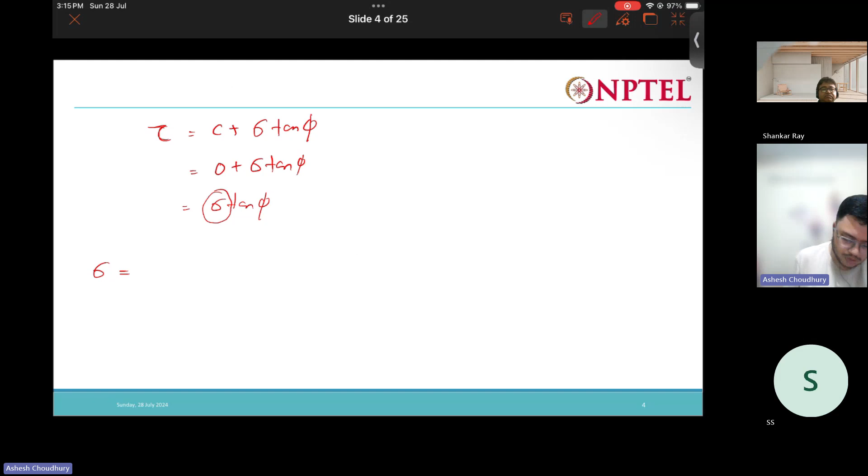2.4, so this is 2.4 into the density of this part. Here the soil is actually dry, so we can write a dry unit weight, which is given. So this is 2.4 times 17.06, plus this 5 minus 2.4, that is 2.6

times the submerged unit weight, isn't it? So here we will have to use the submerged unit weight. So for that we need to find out the submerged unit weight. The submerged unit weight is given by G minus 1, by 1 plus e, into gamma W.

G we know, but E, that is the void ratio, we don't know. So how to calculate that? We can calculate that from the dry unit weight. So dry unit weight is G gamma W over 1 plus E, this much only.

So this gamma W, gamma D is given as how much? 17.06. G I have already, 2.69. Gamma W is 9.81. So 1 plus E - from here what I can do is find out E. So please calculate the E value from here, the void ratio value.

Alright, now the next task is: what if the water table rises to the ground surface? Then what do you think is going to happen? Will the effective stress increase or decrease? Will decrease. Yeah, effective stress is going to decrease. So just find out the new effective stress.

It is going to be 5 times 10.73, because everything is submerged now, which is 53.62, right? So then again you can find out the shear strength from here: 53.62 times tan 38, so we will get some lesser value of this shear strength, right? So quite easy and simple.

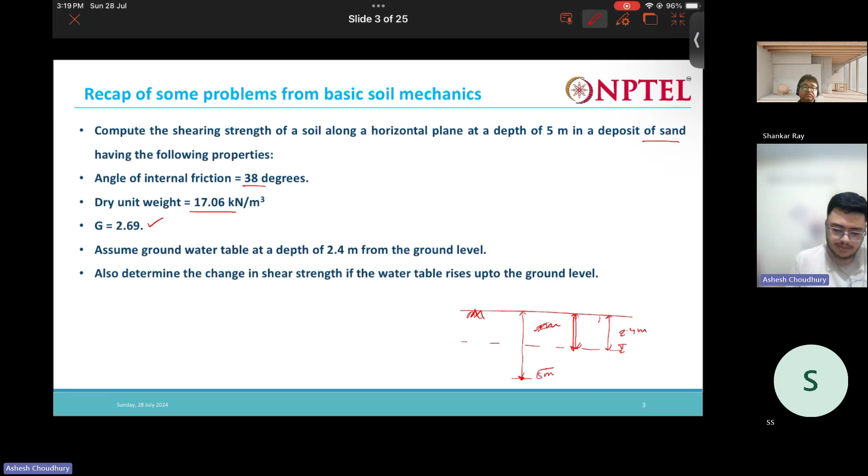So with this we recall our basic concept of shear strength. Now let us see one more problem related to shear strength itself. A standard specimen of cohesionless sand was tested in a triaxial compression test, and the sample failed at a deviator stress of 482 kPa when the cell pressure was 100 kPa under drained condition. The condition is drained, meaning the pore water pressure is 0 here.

Find the effective angle of shearing resistance of sand - this is the first part. Then, what would be the deviator stress and the major principal stress at failure for another identical specimen of sand if tested under a cell pressure of 200 kPa. Let us forget about that for now and solve the first part.

So it is given that the deviator stress at failure is this, and the cell pressure, what is the confining pressure? Confining pressure is 100 kPa. And what is this confining pressure? Confining pressure is nothing but the minor principal stress, sigma 3. So we can write this as sigma 3 dash.

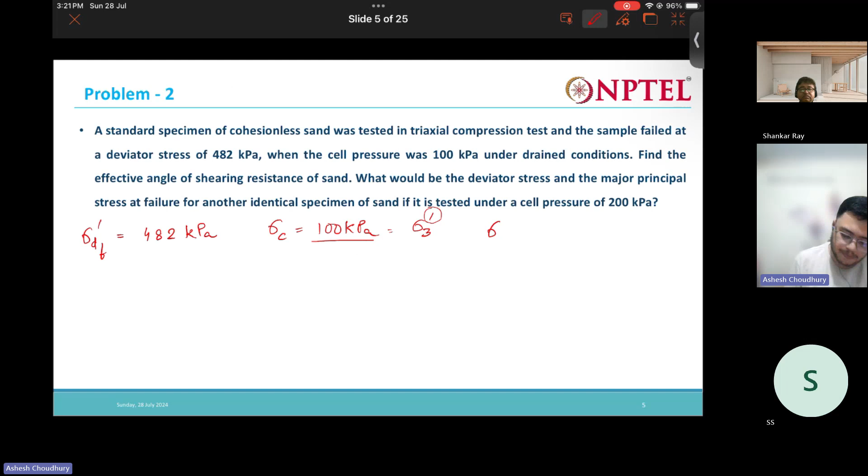This dash actually refers to effective. Since the soil is in drained condition, we are saying the pore water pressure is 0. So total minus 0 will give us only the effective value, right? So this cell pressure of 100 kPa is the minor principal stress sigma 3. Now what will be the major principal stress sigma 1 dash? What is that major principal stress going to be?

482 plus 100, that is 582.

Okay, correct. Now the first part is to find the effective angle of shearing resistance of sand. Can you recall the equation that relates the principal stresses? This also comes from the Mohr-Coulomb failure theory. What is the equation that relates this with phi and c?

So one more basic equation that we have: sigma 1 prime is equal to sigma 3 prime times tan square of 45 plus phi by 2, plus 2c tan of 45 plus phi by 2. This is the same Mohr-Coulomb equation, just written in terms of effective stresses.

So sigma 1 I know is 582, sigma 3 I know is 100, tan square of 45 plus phi by 2, and this term is obviously 0 because c is 0. So just try to calculate phi from here, the effective friction angle phi prime.

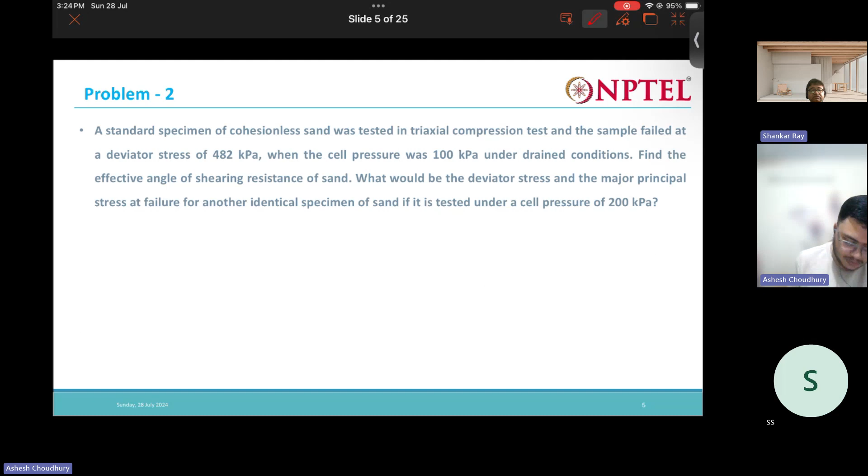Now I got the phi value from here. Since it's an identical specimen of sand, the phi is going to be the same. Now what is asked is to find the deviator stress at failure. So for that, my sigma 3 prime is 200. I can use the same equation.

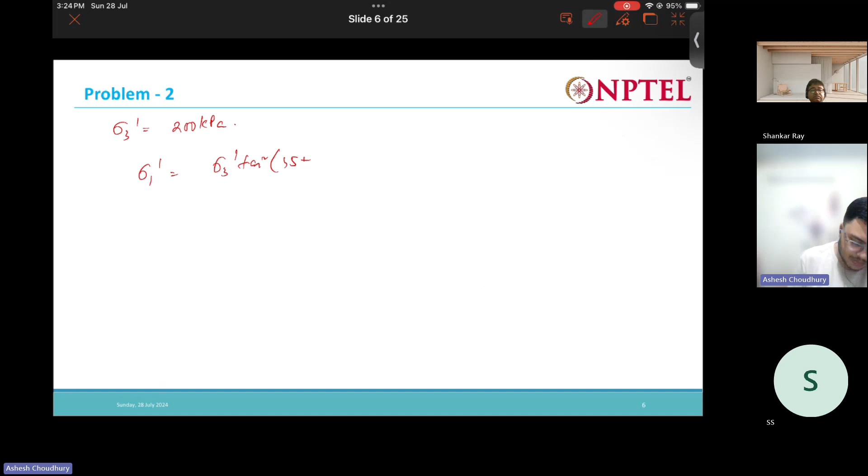45 plus 45 by 2. Please calculate this. Then finally from here I can get the deviator stress at failure.

1166. Okay, 1166 kPa, approximately. So now I have my sigma 1 as 1166. So 1166 minus 200, think what?

966, right? So this is my final deviator stress at failure for the second sample.

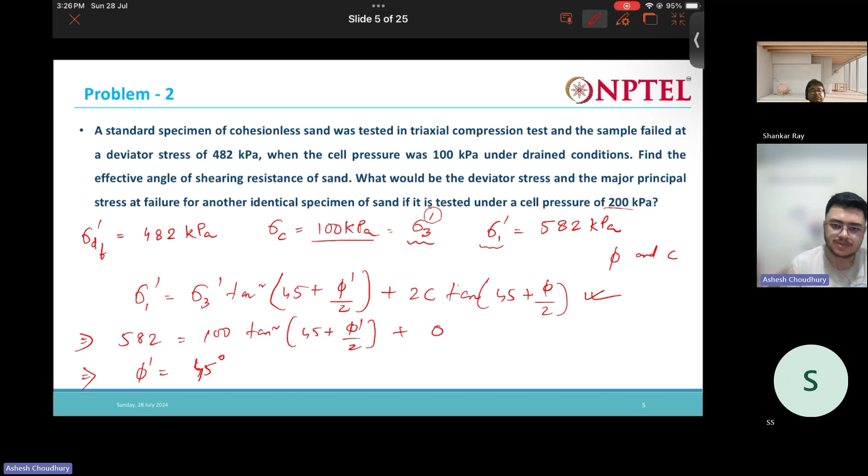Okay, so this problem was also quite simple. Directly just using basic concepts of what is deviator stress, which one is the minor principal stress, which one is the major principal stress. Those concepts we use just to solve the problem.

Now let us see this next problem. Two identical soil specimens were tested in a triaxial apparatus. The first specimen failed at a deviatoric stress of 770 kPa when the cell pressure was 200 kPa. The second specimen failed at a deviatoric stress of 1370 kPa under a cell pressure of 400 kPa.

Okay, so two samples are given, so four values are given. Determine the value of C and phi analytically. Let us first do that. So we'll get two equations with two unknowns, so we can easily calculate the cohesion and friction angle value.

Similar to the previous problem, we can solve this one also. So the deviator stress at failure values are 770 and 1370. And the cell pressures are 200 and 400. From here I can get sigma 1 for both: 770 plus 200 for the first, and 1370 plus 400 for the second.

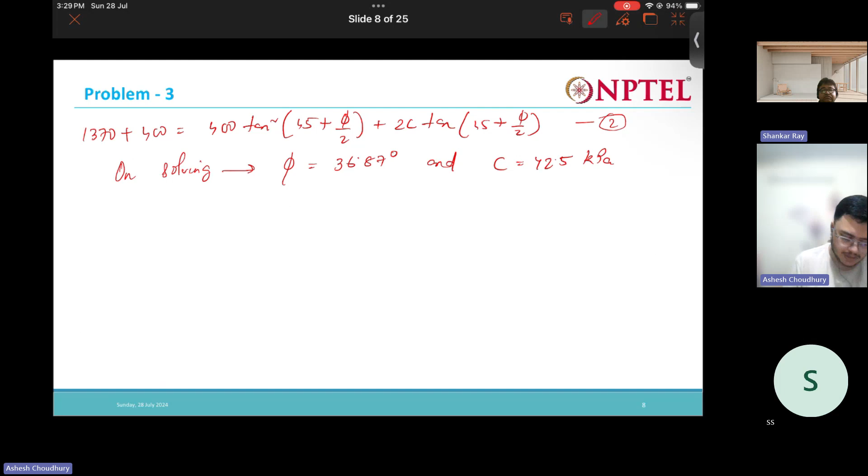Now the final part of the question is, if the same soil is tested in a direct shear apparatus with a normal stress of 600 kPa, estimate the shear stress at failure. Please do this one. Normal stress is given, C and phi we already know from here, and normal stress is given as 600 kPa. So easily we can calculate the shear stress at failure. Please calculate this.

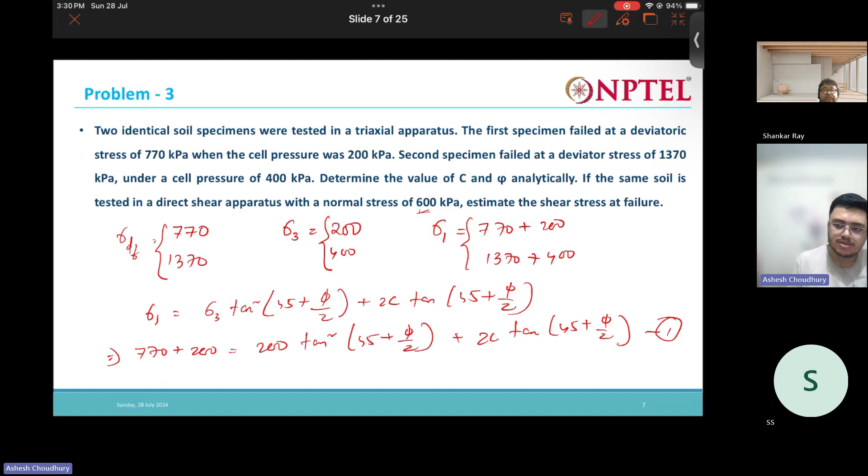So I have C, I have phi, and I also have the normal stress, 600 kPa. Similar to the first problem, just this basic equation, our basic Mohr-Coulomb failure theory, we have to use.

So this is the final result. Quite simple and straightforward.

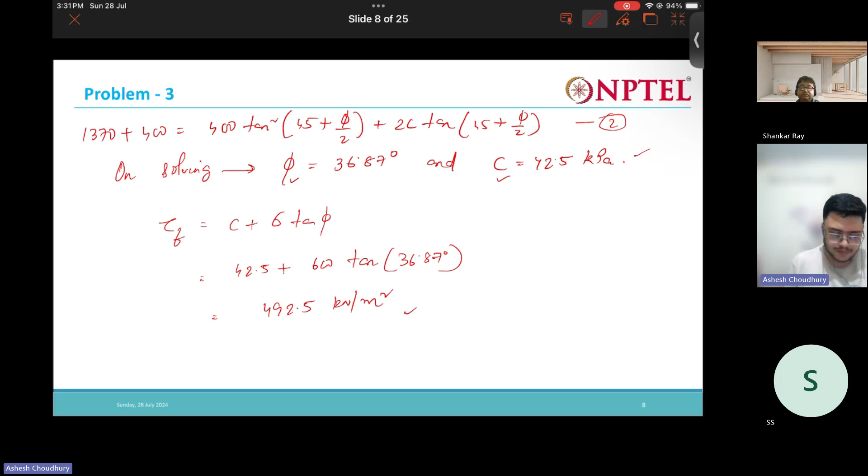Now let us see this. This is the case of a CD triaxial, that is consolidated drained triaxial test. If you remember, in the triaxial test we have two stages. The first stage is our consolidation stage, and the second stage is the shearing stage. Consolidated drained means in the first stage we are allowing the consolidation of the soil sample to happen completely, and then after complete consolidation, we keep the drainage valve open and shear the sample. We apply the deviator stress and shear the sample.

As we are allowing drainage, this is a consolidated drained test. CD tests generally take a long time to perform, because the shearing has to be very slow so that excess pore water pressure does not develop, and the shearing is slow so that water drainage is appropriate. So excess pore water pressure should not develop in that time. Loading rate should be adjusted so that water gets drained out without inducing any excess pore water pressure. So it's actually a very slow test.

So what is the question? A CD test was conducted on a normally consolidated clay, yielding the following data. Minor principal stress, sigma 3, is given, and deviator stress is given. Similar problem only, we need to find the angle of internal friction. This first part, the angle of internal friction, we can easily determine from the basic equation, whatever you use, from that you can easily determine phi.

Sorry, yeah, so say... sorry, just a second. What's wrong? Wait, just a second.

So say this is sigma 1 and this is sigma 3. This is a section, and say the failure is happening along this plane. This is the failure plane, and this plane is our major principal plane. This failure plane makes an angle theta with the major principal plane. So that angle we are asked to find out.

Third is the normal stress on the plane of maximum shear stress. If you recall, the plane of maximum shear stress and the failure plane are not actually equal. Failure does not occur at the plane of maximum shear stress. Maximum shear stress always occurs at a plane 45 degrees inclined to the major principal plane. But the failure plane is different, somewhat different. So that normal stress on the plane of maximum shear stress, we are asked to find out. We will see that.

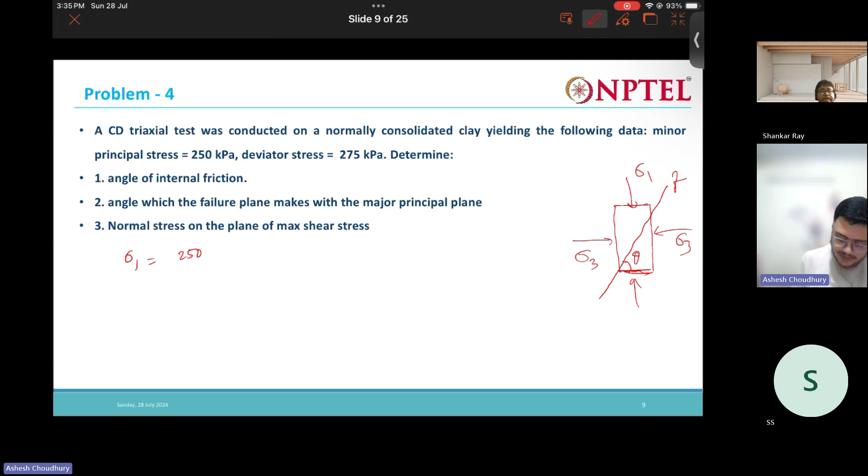So first, let us find out the angle of internal friction. Sigma 3 we have, sigma d we have. So what is sigma 1? Sigma 1 is nothing but 250 plus 275, which is nothing but 525 kPa. Now sigma 1 and sigma 3...

Now phi I can, so what is the C? Can you tell me what is the cohesion value for a normally consolidated clay? Zero. Yeah, for a NC clay, for normally consolidated clay, it's always zero.

Though it is a clay, from here we can recall one more concept from basic soil mechanics: cohesion is not an inherent property of the soil. Cohesion actually depends on the state of the soil. Here the soil is normally consolidated, that's why we get C equals 0. So this cohesion is not the actual inherent property of the clay.

The inherent cohesion which we actually get from the electrochemical property, that is the cohesion between the particles in the clay, in practicality that is actually lost. That cohesion hardly plays any role. But this cohesion value that we define here actually comes from something else.

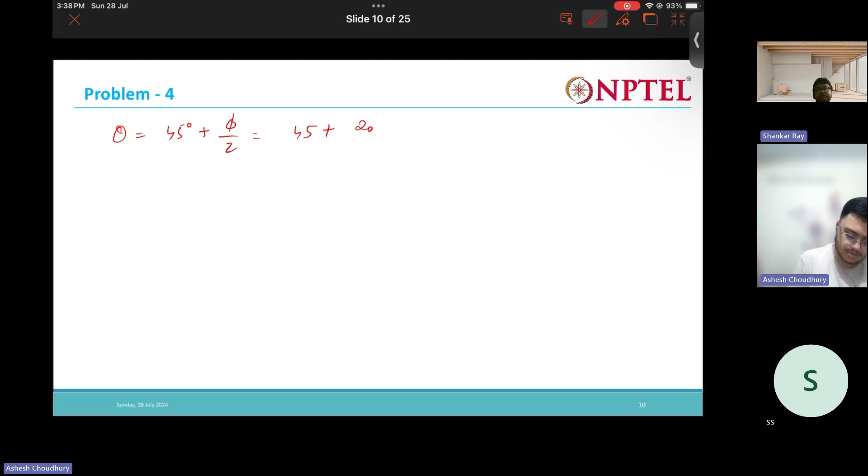So 45 plus phi by 2 is 55.39. Okay, done. The final thing that is asked is normal stress on the plane of maximum shear stress.

So let me just draw a Mohr circle. So this is the shear stress, this is the normal stress. This is the point of maximum shear stress, right? So here we have tau max. So this angle is how much? 45 degree.

So what we are asked to find out is this. What is the normal stress at this plane? For that, we can directly use this relation: sigma 1 plus sigma 3 by 2, plus sigma 1 minus sigma 3 by 2 into cos 2 theta.

So what is sigma 1? Sigma 1 plus sigma 3 is 525 plus 250, by 2. And sigma 1 minus sigma 3 is nothing but our deviator stress. What is the deviator stress? 275. Cos 2 theta. So from here I will get 338.62. Done.

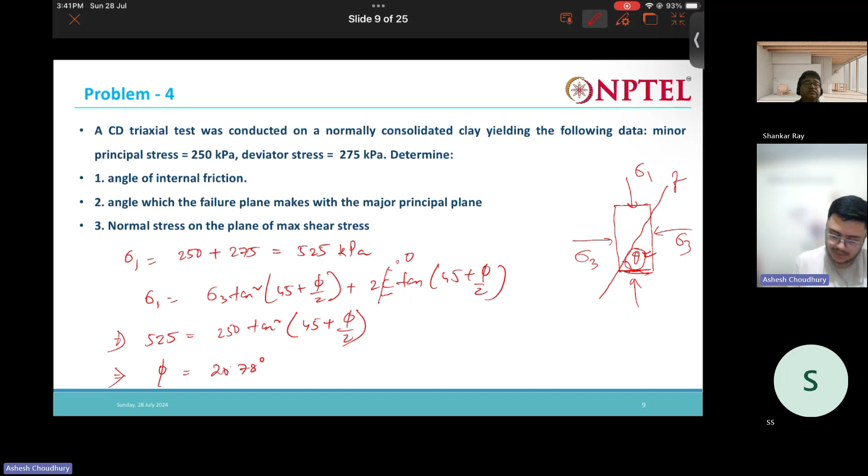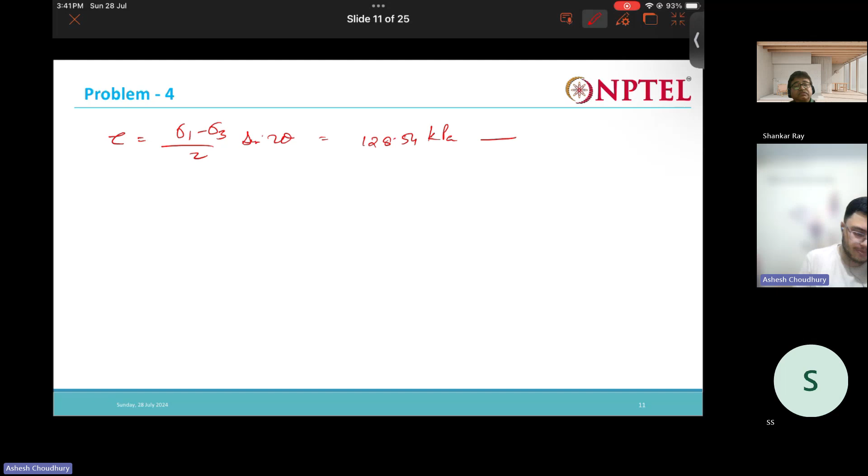Now it is tau is equal to sigma 1 minus sigma 3 by 2 times sin 2 theta, right? So this will come out as 128.54. Okay, this is shear stress at failure plane.

And one more thing, the last question: what is tau max, the maximum shear stress? This is the normal stress at failure plane. Yeah, and this is the shear stress at failure plane.

Now I am asking what is the maximum shear stress? Very simple, this is the deviator stress by 2. Correct, the deviator stress by 2, it is sigma 1 minus sigma 3 by 2. How much is the deviator stress? 275, right? 275 by 2.

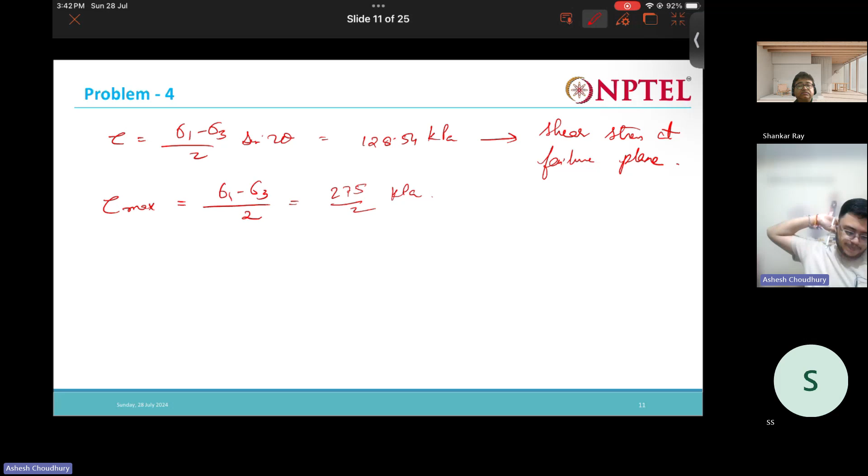Okay, so we found out the normal stress at failure plane, right? And what is this normal stress that I was asking at the beginning? What is the normal stress at the plane of maximum shear stress? So this is the normal stress at the failure plane. What is the normal stress at this plane where the shear stress is maximum? What is this? That's simple.

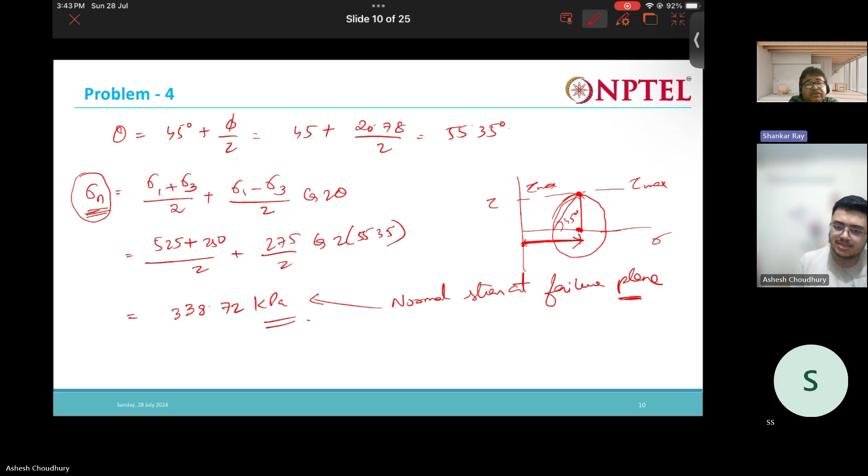The distance of the center of the Mohr circle from here. Can you repeat the question? I asked: what is this sigma and what is this that we found out? What is this one? Normal stress at failure. Correct. And this is the shear stress at the failure plane, right? And this is our maximum shear stress.

Right. So at the plane where we are getting this maximum shear stress, at that plane what is the normal stress? That I am asking. At the plane of tau max, what is the normal stress?

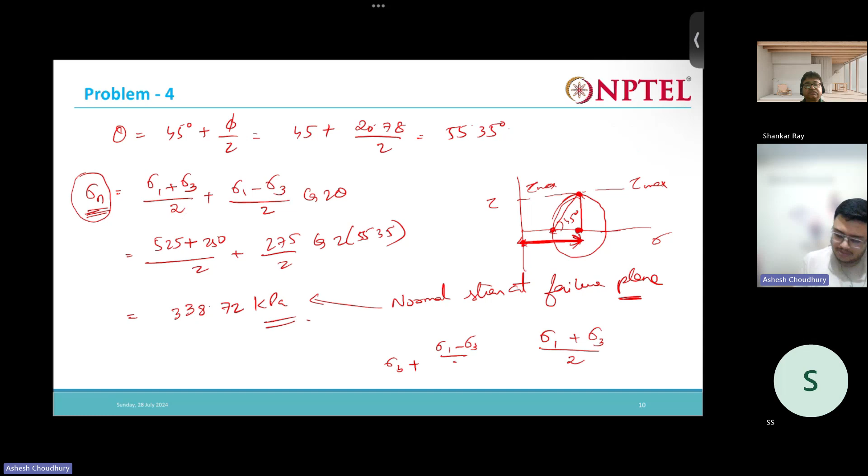Sigma 1 plus sigma 3 by 2 - this distance, the distance of the center of the Mohr circle from the origin, is sigma 1 plus sigma 3 by 2. From here to here it is sigma 3, plus this distance which is sigma 1 minus sigma 3 by 2. So finally you get sigma 1 plus sigma 3 by 2.

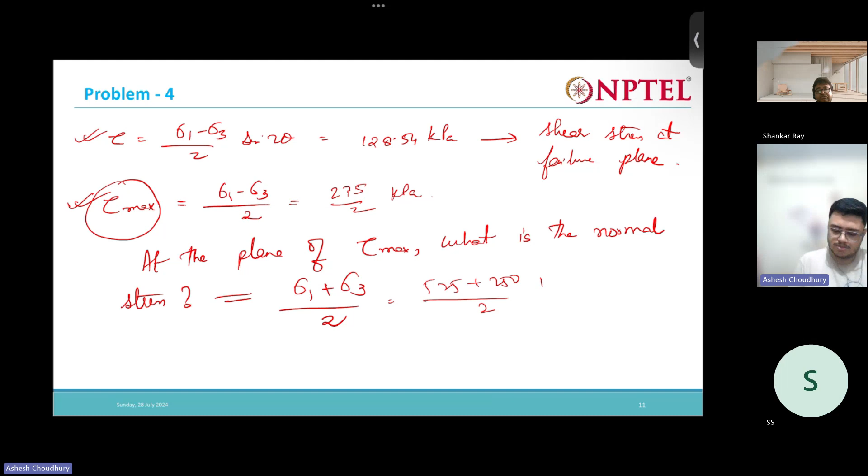So if you want to calculate this, 525 plus 250 by 2.

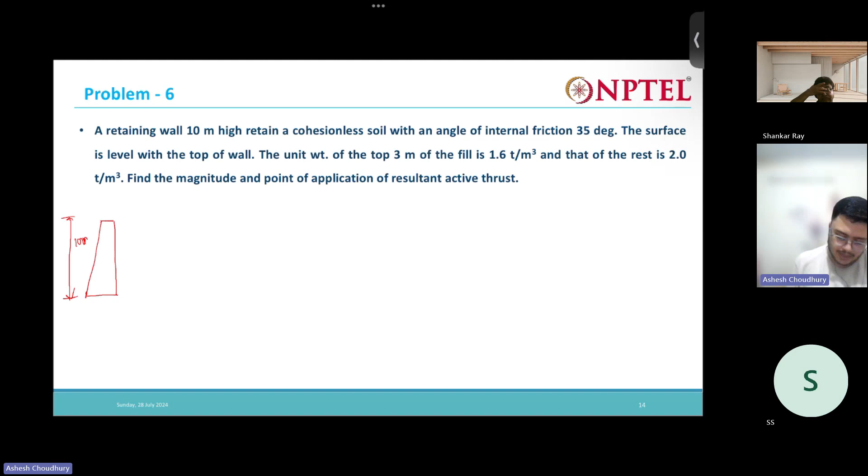Okay, so we have some retaining wall, and the retaining wall is actually 10 meters high. The surface is level with the top, the surface is plane. The unit weight of the top 3 meters is 1.6 ton per meter cube, and the rest 7 meter, we are having 2 ton per meter. We have to find the application of the resultant active thrust. Okay, the resultant active thrust we need to find out.

Do you recall what is the active earth pressure coefficient? How to calculate the active earth pressure coefficient? 1 minus sin phi by 1 plus sin phi. So what is the angle? 35 degrees. So 1 minus sine 35 by 1 plus sine 35 is going to be...

0.271. Right? Very simple. So now what we are going to do first, for the 10 meter, this is the 3 meter, say 7 meter, this is the 7 meters. So the first top portion, top 3 meters, it will be something like this, right? The variation of the active thrust, and what is this value? Ka into 3 into 16. 16 means, in kilonewton per meter cube, it can be approximated as 16 kilonewton per meter cube.

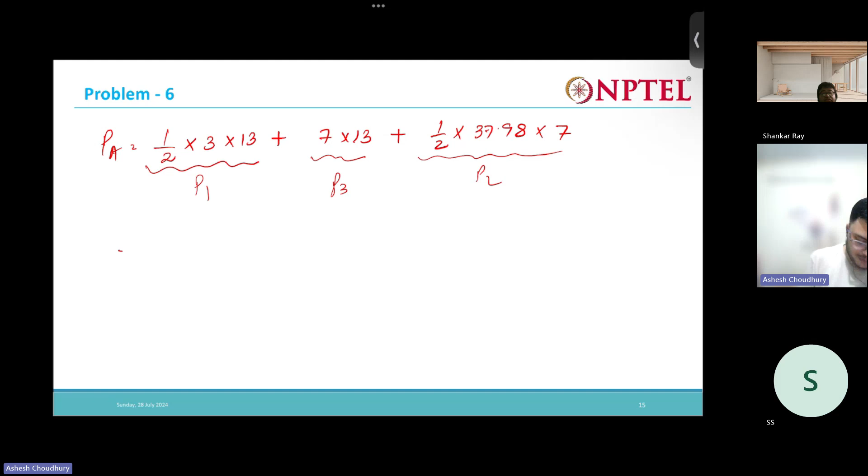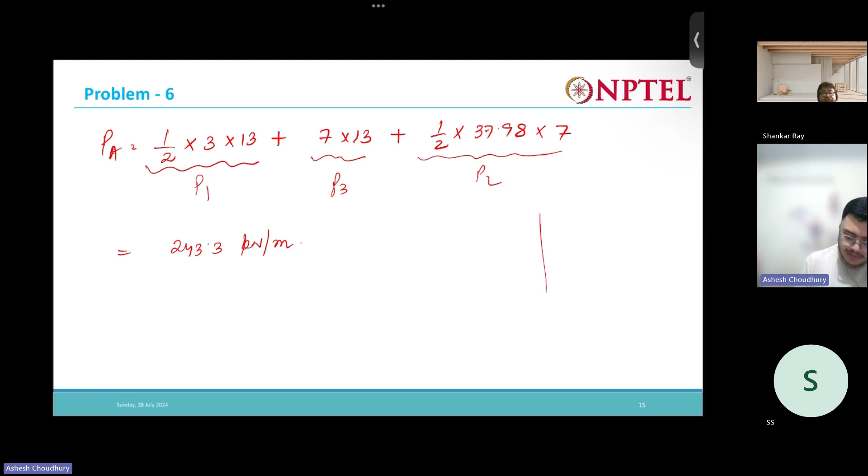This, what to say, the point of application of this active thrust. Okay, so some height y below the ground level where this active thrust is acting, that we need to find out. That easily you can do again. So this one is how much? This one is 19.5, this one is 91, and this one is...

132.93. Okay, so 19.5 into the distance of the centroid of this triangle from the bottom, from here to here. So 3 by 3, plus 7, it will be 8. 8 plus 91 into 7 by 2, that is 3.5, plus 132.93 into 7 by 3, divided by 243.3. If we do this, we will get the y value.

So this y comes out as 3.22 meters. So this PA acts at a height of 3.22 meter from the base, this is the point of action of this PA. All right.

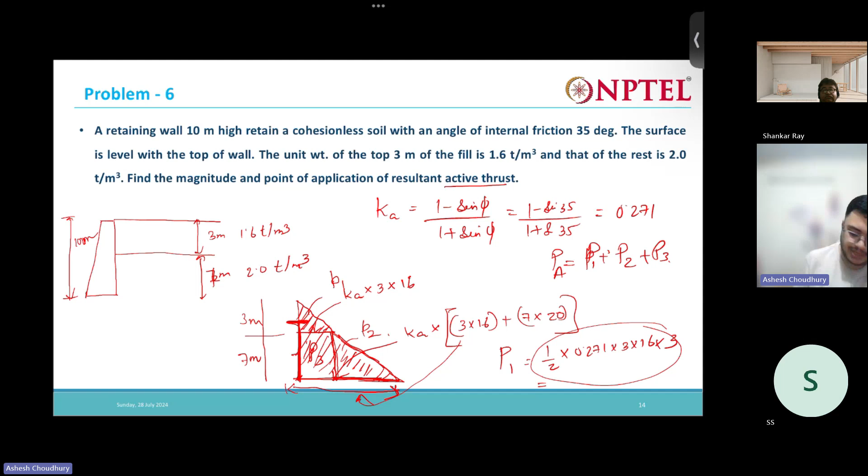Right. So quite easy, right? We just need to divide. If I draw this triangle here, the whole figure here.

So what we are doing is dividing it into three parts. For this triangle I know this height and this base length. For this rectangle, this base length is the same, and this height also I know, so I know this area, I know this area.

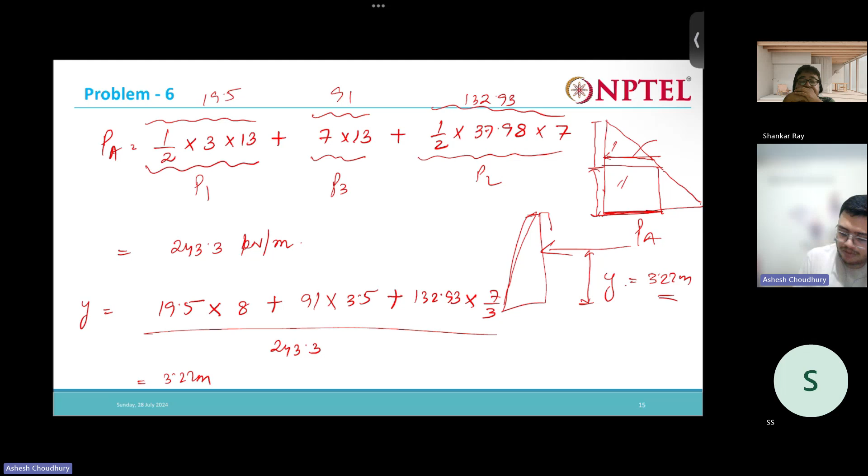Similarly for the lower triangle, I know the total length, so I can subtract this one to get this length, and again I know this height, so I can find that area too. So like this you need to do it. You can do this again by yourself and just check the results. I'm not wasting any more time on this.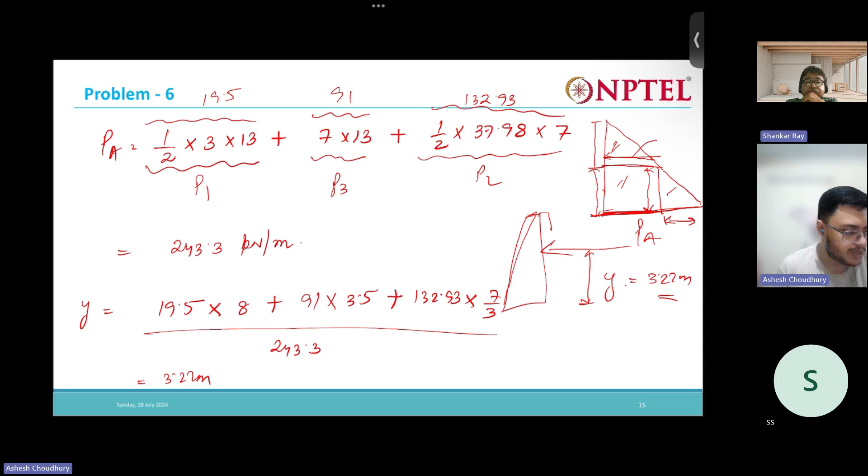Similarly, we will solve one more similar problem. This is a retaining wall, a 5-meter retaining wall retaining cohesionless soil with an angle of internal friction of 35 degrees. The surface is the same, and the water table is below the bottom of the wall, meaning no action of water table, so no problem regarding that. Determine the percentage change in the active thrust if the water table rises to the ground.

So there are two cases: one where the water table is below the wall level, and a second where it is at the top. In the two cases we are going to find out the active thrust. Say this is the wall, a 5-meter height wall. So for the first case, directly I can find PA, right?

So what is PA? Half... so the variation will be something like this, right? What is this? This is K times gamma. What is gamma? 17. Where is that? Yeah, that I forgot to actually give.

This gamma is given as 17 kilonewton per meter cube. So half into 5 into 17 into Ka. Ka is for 35 degrees, so previously whatever Ka we used, 0.271, will be the same.

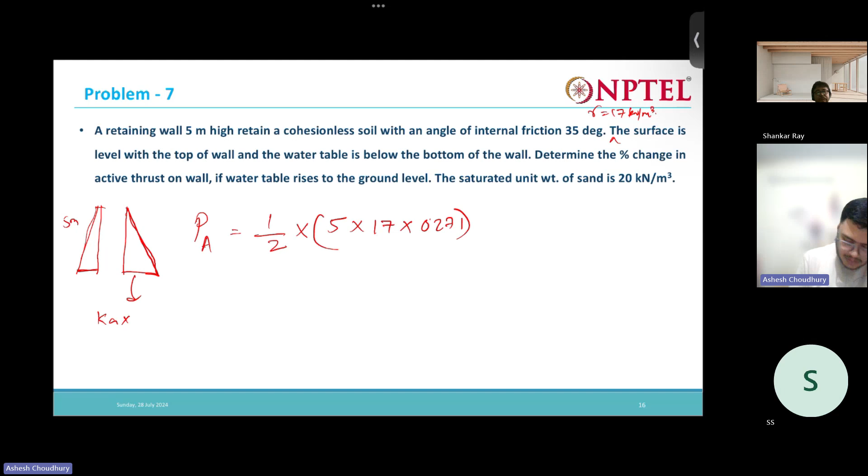So half into 5 into 17 into Ka into 5. This is going to give us PA in the first case, when there is no action of water, since the water is below the bottom of our retaining wall. So no problem regarding that. If you calculate this, you will get 57.58 kilonewton per meter.

Now for the second case, our water table is actually here. For that case, first we will calculate the submerged unit weight: saturated is given as 20, minus 9.81.

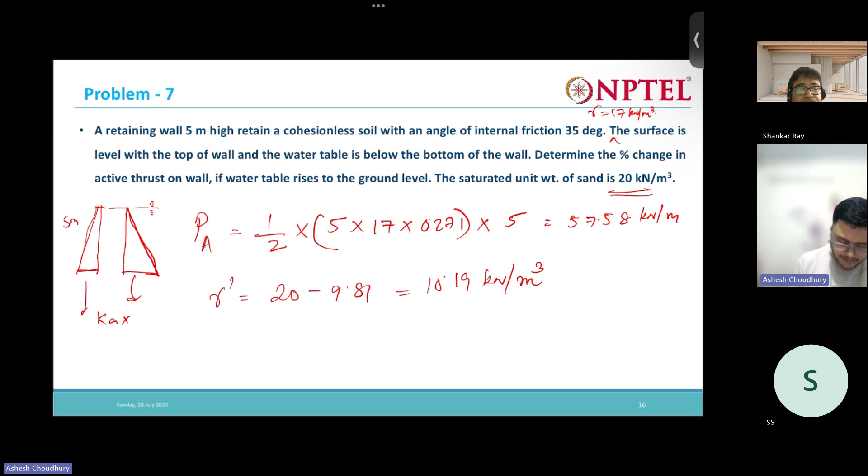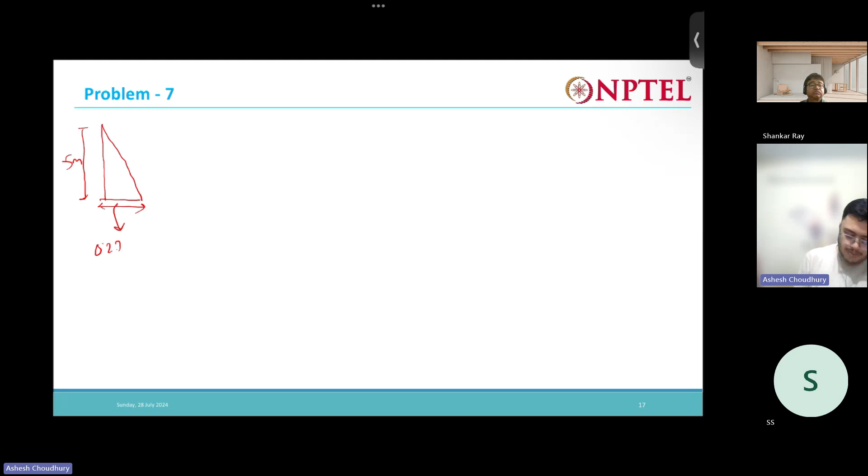Now there will be two parts, right? One triangle will be the thrust coming from the submerged soil. This is 5 meters. What is this length? 0.271 into 5 into 17 - this is the active thrust coming from the submerged soil.

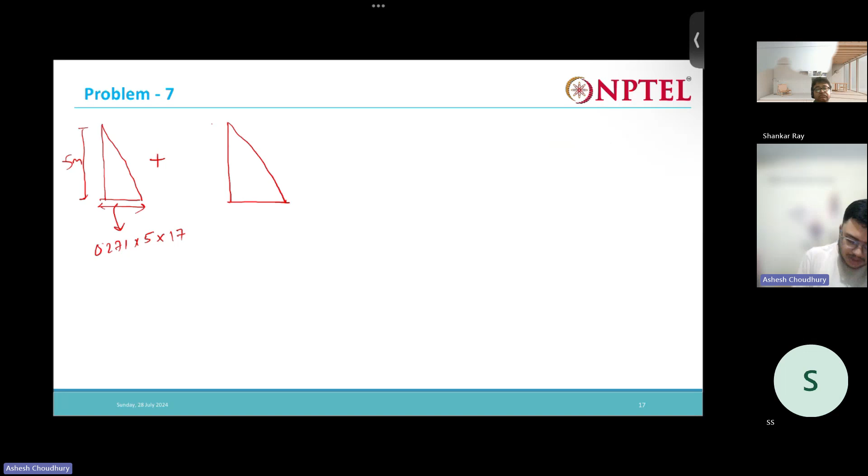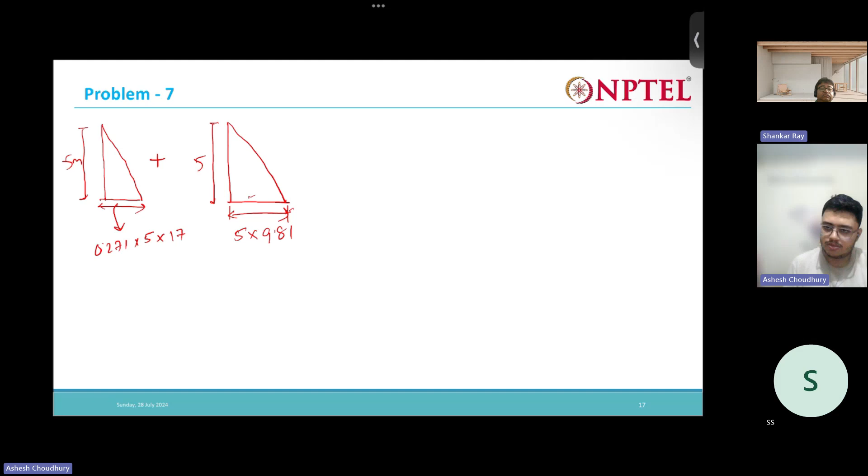In addition to that, we need to consider the water thrust also. This is also 5. How much will be this one? 5 times 9.81, that is the unit weight of water. So this one is coming from the soil, and this one is the lateral thrust coming from the water.

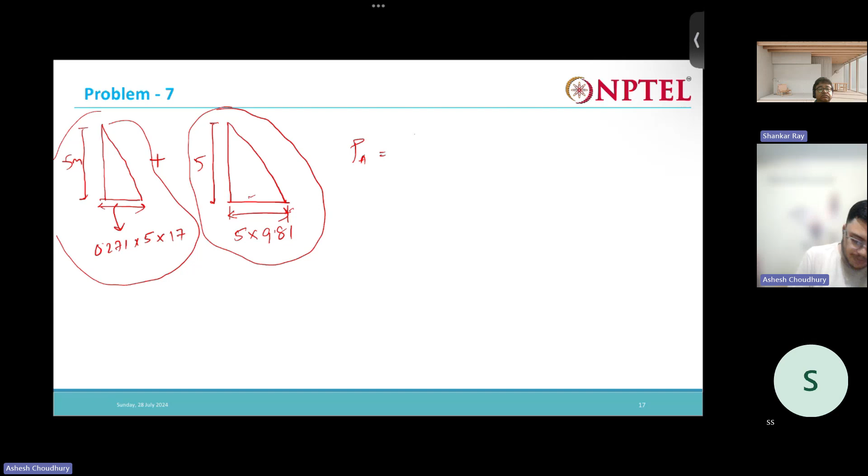These two we have to add. So now our final PA will be half into 0.271 into 5 into 17 into 5, where 0.271 is Ka - but for water, this K won't apply, there. And then we have half into 5 into 9.81 into 5. Now if you sum it up...

So now let's see the percentage increase. When the water table was below, the active earth pressure was only 57.58 kN/m. But now when water is there, when the soil is completely submerged in water, this is increased to 157.14.

If you want to calculate the percentage increase, it comes at approximately 170. So you can see a huge increase in the lateral thrust on the wall if the backfill soil is submerged. Always we need to consider this in design, and we want water to drain out from the backfill as fast as possible, because if the backfill is submerged or there is a huge amount of water retained in it, that water is going to create huge lateral pressure. Due to this, many retaining walls actually fail if not designed properly.

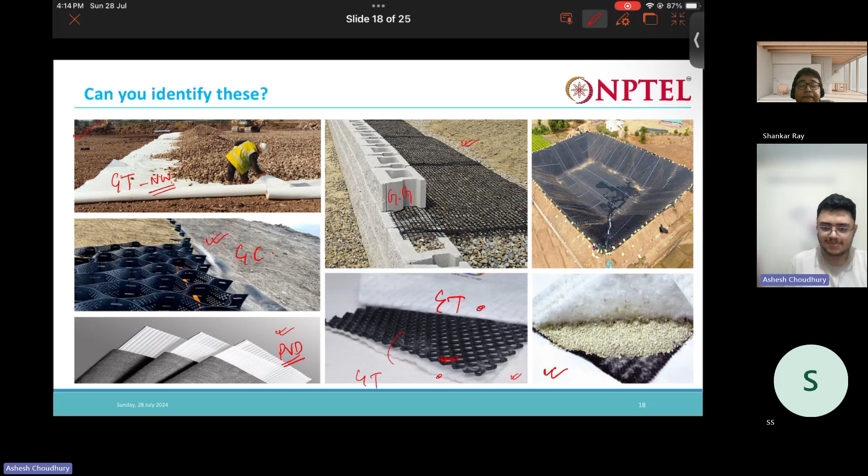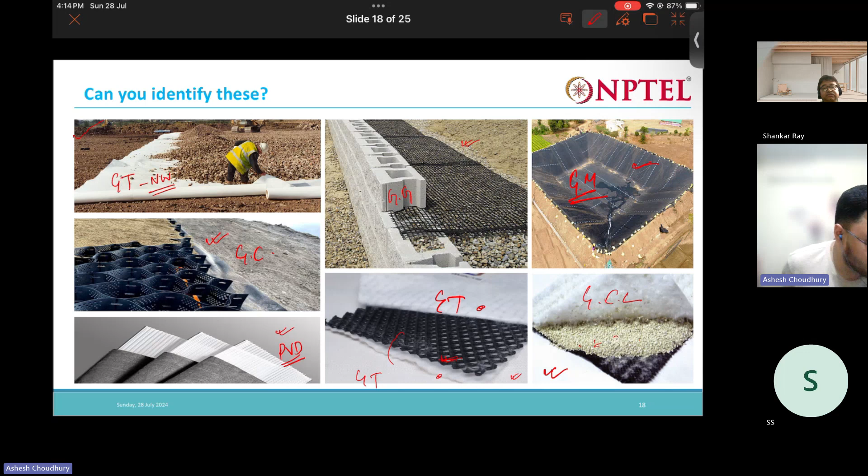Now, so I will... yes. So this one, actually we had gone for a site visit during my bachelor's. So you can see this PVD installation.

So this crane, what they were doing is constructing an approach for a road overbridge - not a railway overbridge, ROB - and below it was a railway line. So they had to construct one road over the ROB, and for the ROB approach construction, below where the approach would actually come, above the subgrade, they were going to construct the approach. So before the approach, what they did was treat the soil with PVD, they installed PVD.

They did this so that they could accelerate the consolidation of the subgrade layer. Within 6 to 8 months, they could achieve almost 80 to 90% consolidation using these PVDs. Over that, they actually constructed the approach of the ROB, and for the approach, they used reinforced geogrid for the construction.

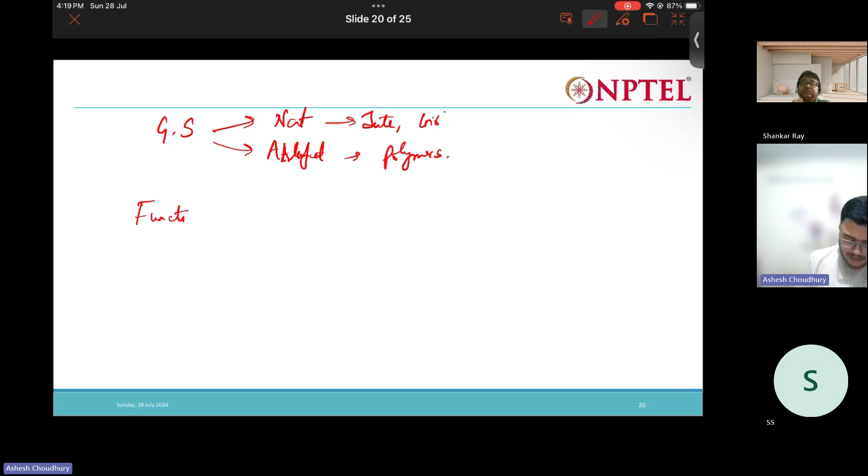Reinforcement - yes, first is reinforcement. For example, some examples - if you can think of some examples where we use it as reinforcement. RE walls, this is the most common example. What kind of geosynthetic do you use for reinforcement? Geogrid - correct, mostly 90% we use geogrid. So for this we use geogrid. What are the types of geogrids available to us?

Uniaxial and biaxial, right. Yes, we have uniaxial geogrids and also biaxial geogrids. So geogrids are the main constituent whatever we use for reinforcement. Apart from that, geotextiles also sometimes we use, though not that much, and also steel strips also we can use for reinforcement.

Okay, then one more function - filtration, correct. For filtration, what do you use? Geotextile - yeah, we use geotextile. So what is the purpose of filtration? The filtration purpose is to allow water to pass through it but retain the soil particles. Right, so behind the RE wall, if you are using, that time you are also using it for the purpose of filtration only. You are preventing the backfill soil from going inside the drain and blocking it, while allowing water to pass through. So that is filtration.

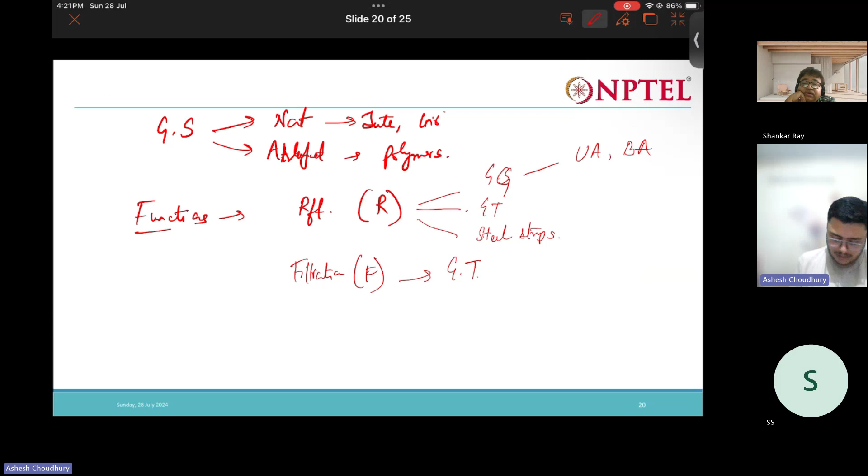Then next, as the impermeable membrane - that is barrier, right? So what do you use for barrier? Geomembrane, GCL - yes, geomembrane and GCL. These are the two most common barriers that we use. Geomembranes are nothing but like that polythene or whatever sheet that we see - similar to that, geomembranes are like that only.

There are some properties of this also that we need to consider while we use that, which we'll see as we progress in the course. The strength of these geosynthetics is also important - what strength of geosynthetic you are using depends on what condition you are going to keep it in. For geomembrane, apart from mechanical strength, chemical resistance is also important.

Because geomembranes are used as barriers, mainly industrial waste is dumped in landfills - specialized landfills or ponds made with geomembrane lining, for dumping industrial waste or something like that. In that case, we have to ensure that the chemical we are dumping does not corrode the geomembrane very easily. The geomembrane should last its design life.

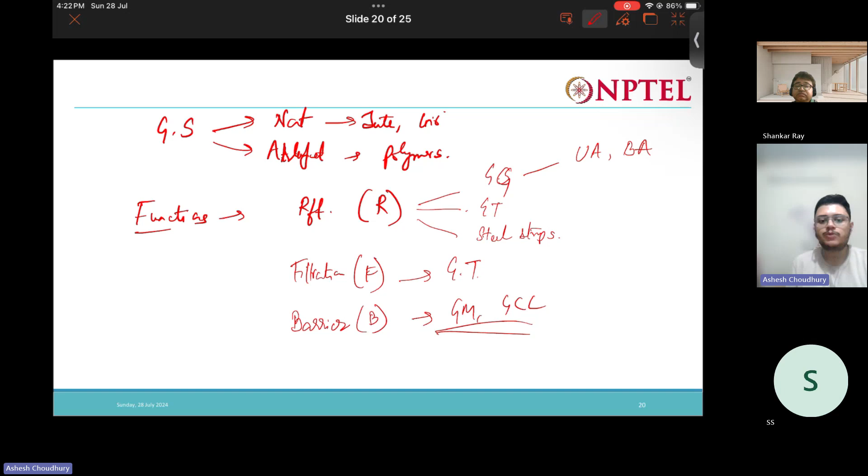Else what will happen? That material will damage the geomembrane, and then that harmful substance will leach into the ground. Once it leaches into the ground, it is going to damage the ground surface, damage the groundwater table, and the groundwater table is going to get contaminated. There are going to be a lot of things - so these are also very important to consider.

Okay, so then more functions - drainage, yes. For drainage you can use geotextile, and geonets you can use as well. Then next, erosion control, yeah, erosion control.

Erosion control you can use geotextiles. So in the slope you can put geotextile. It is always preferred to put this jute geotextile.

In India we have the National Jute Board, and they are actually promoting jute geotextiles and coir geotextiles to a large extent nowadays. They are investing a lot in this because it gives employment to small scale industries. Construction of these jute textiles is sustainable also, and plants can easily grow over it. So that is very prevalent nowadays.

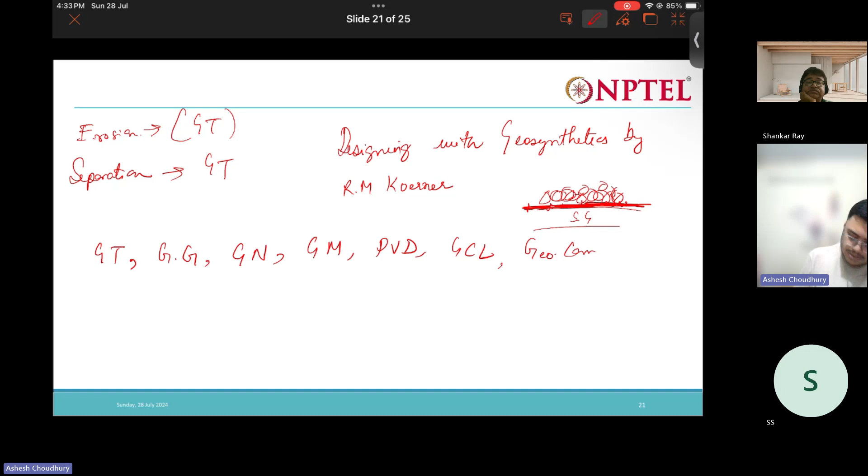Before that, let us recall the types of geosynthetics that we have. First one is geotextile. Then we have geogrids, then geonet, then geomembrane, PVD, GCL. Then geocomposite, geocell. Also we have some more things called geobags.

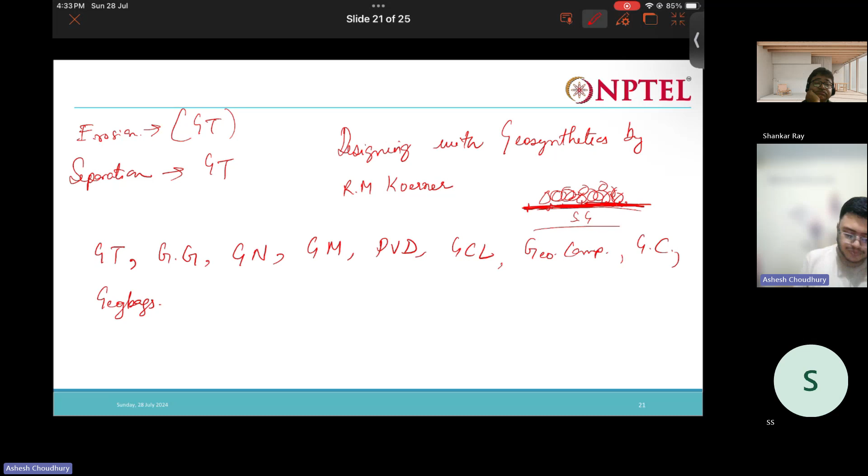Geotextile is either woven or non-woven. Woven means it is woven, like whatever textile we are wearing, these are also woven, so like that it is woven. Non-woven means the strands are somewhat haphazard, either heat bonded or needle punched. There are various manufacturing processes that make non-woven geotextiles.

So for various functions we need various types of geotextile. Woven, somewhere we use woven, somewhere we use non-woven. If you want the geotextile to have some strength, some reinforcement properties, then obviously we are going to use woven geotextile, because non-woven geotextile won't have any strength in any particular direction. So non-woven is generally used for filtration and other purposes.

Then we have geogrids that I already mentioned: uniaxial geogrid and biaxial geogrid. Uniaxial geogrid has strength in only one direction. Biaxial geogrid has strength in both directions. That is also dependent on where we are going to use it, and based on that we decide what to use.

Then geonet, we already saw. Geonet has a predefined plane where water can easily flow through it, so that is mostly used for drainage purposes. Geomembranes we saw, for barrier purposes geomembrane is used.

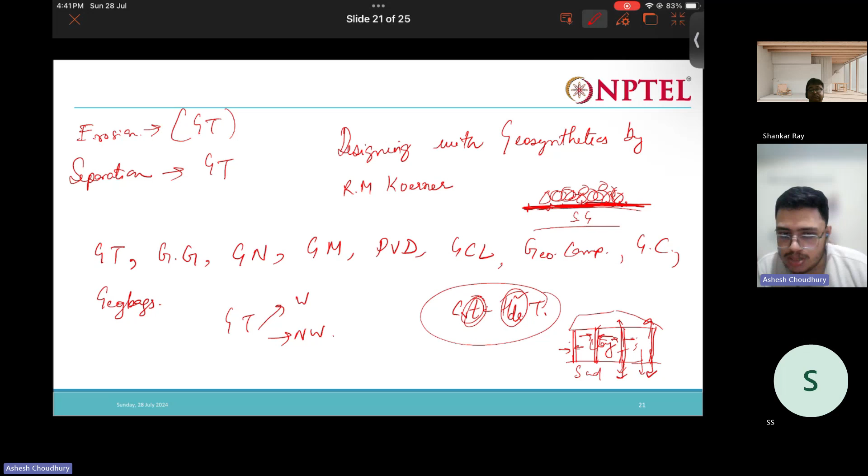Then we have geo bags and geo pipes. Geo bags are bags that are filled with some aggregate, or some soil, and those bags are put on the banks of the river to prevent erosion. Geo pipes are also similar. So these are erosion control structures that prevent river bank erosion.

So let us see some of these pictures. I wanted to show you this, let us see this.

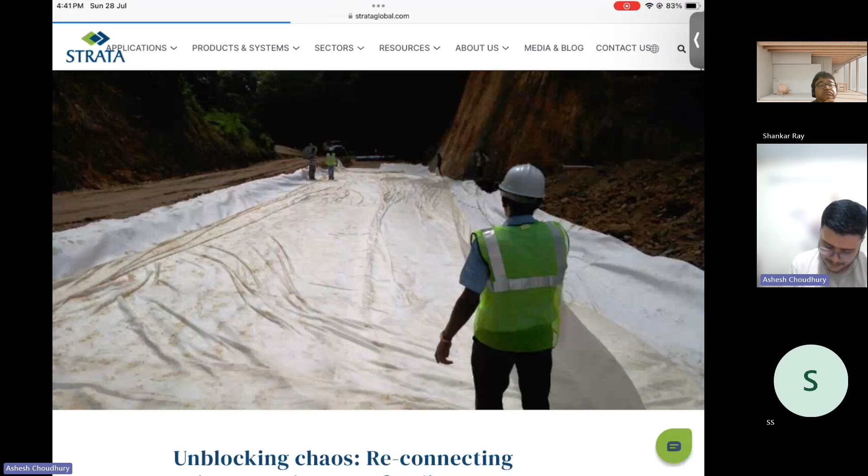Shankar sir, where are you from?

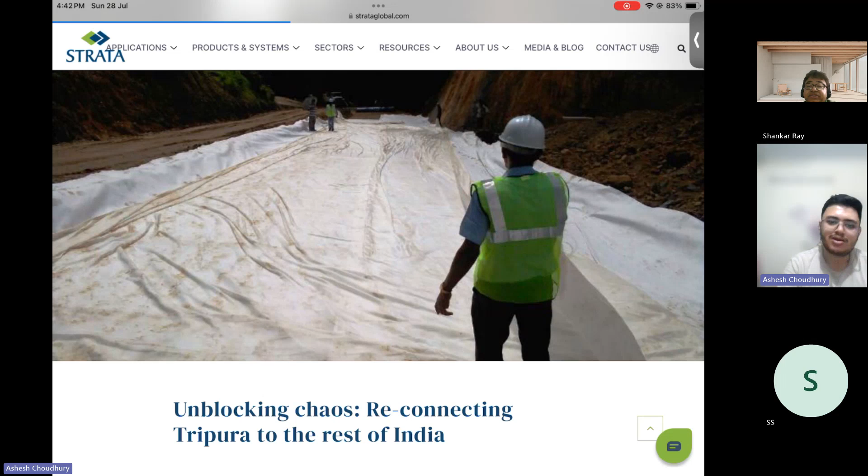I'm working in MECON Limited, Ranchi. Okay, Ranchi, you are from Ranchi? So I'm basically from Calcutta, but I work in Ranchi.

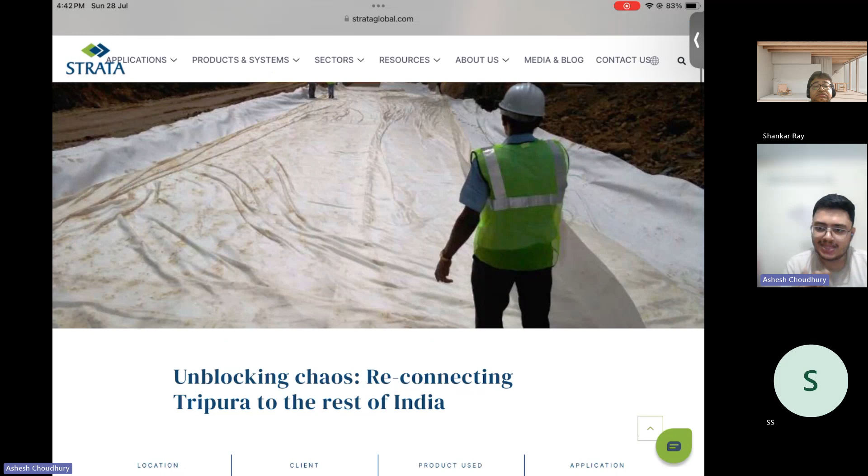So this Strata, you might be knowing this company, right? Yeah, this company, it is very famous.

So this was the condition of the highway, the first picture you can see here. This was the condition of the highway that connected Assam to Tripura. The main highway previously was NH44, now I think the name has changed. So the main highway connects Tripura with Assam, and from Assam it connects to Meghalaya and the rest of India.

They used to construct the highway every year, and every year after the monsoon this used to be the condition of the highway. It used to become like this. Every year this problem used to happen, creating huge problems for the people living in the state of Tripura.

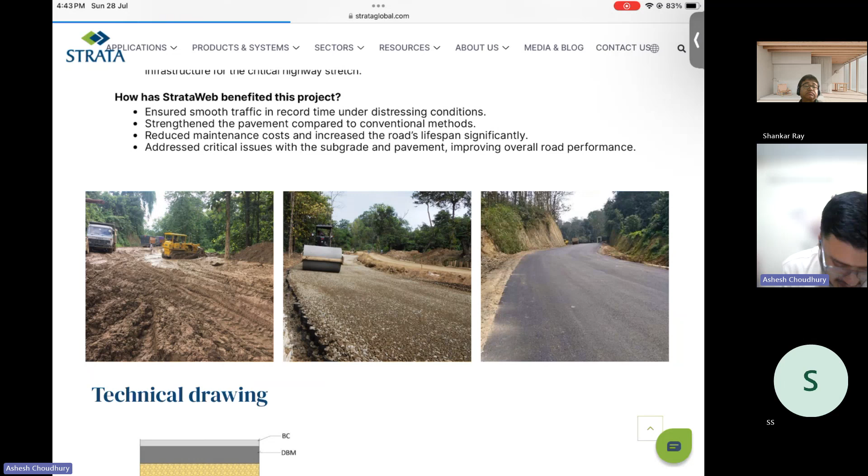This photo is from near the place called Churaibari, which is the border between Assam and Tripura. So what they did was they excavated this whole muddy portion, the large amount of soil, and then put this section in its place.

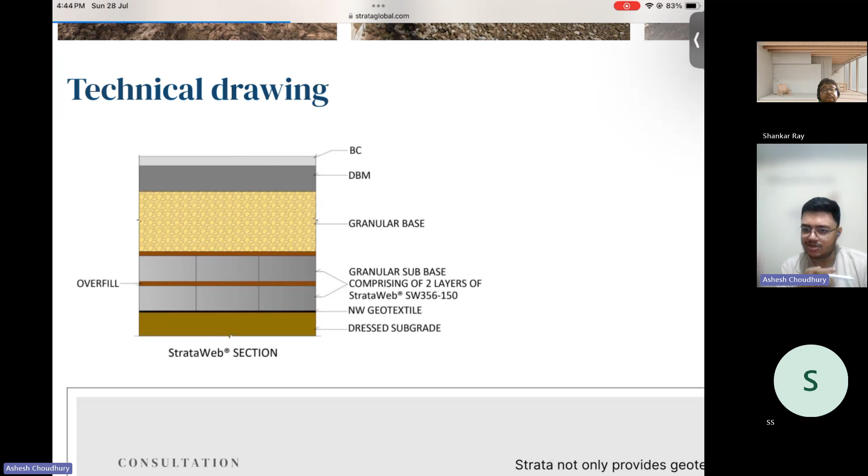First they made a subgrade, then two layers of granular subbase constructed using geocells. Over the subgrade they put a non-woven geotextile. This geotextile serves as a separator.

Over the non-woven geotextile they put two layers of geocells filled with granular aggregates, which they compacted. After that they built the main base of the pavement with the granular base, and above that constructed the bituminous course, DBM and granular base - these are part of the main pavement. Below that are the three layers: the subgrade and the two geocell layers, and above that they built the pavement.

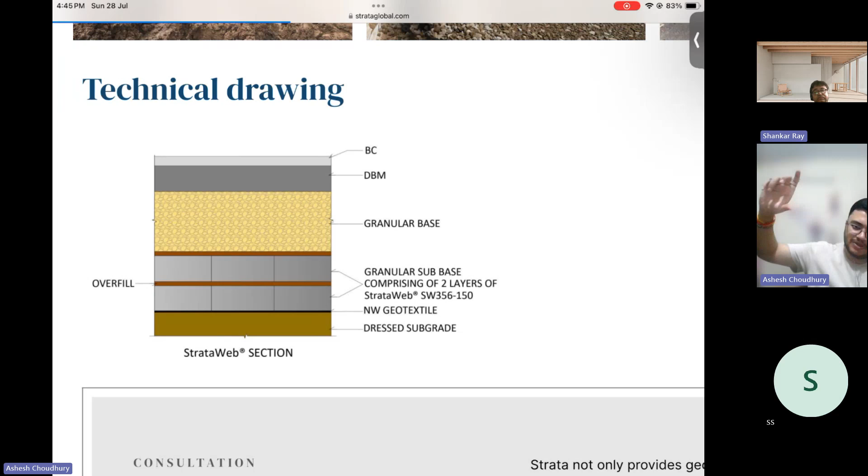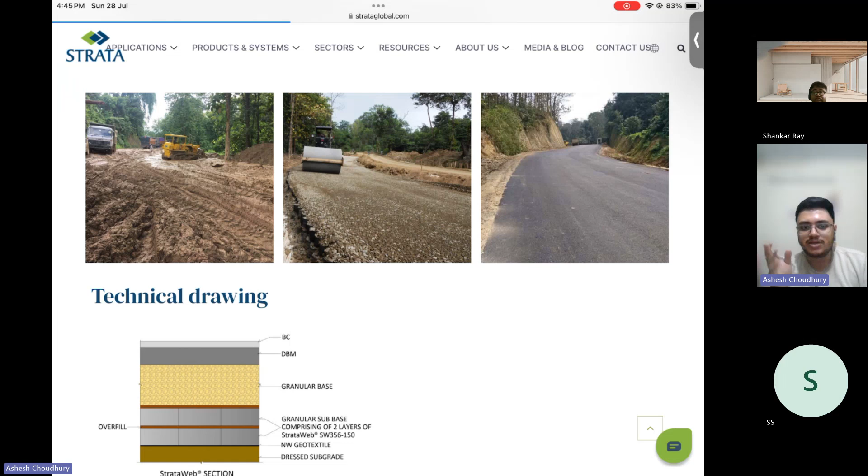This showed very good performance. As you can see, this is the picture from construction, and this photo is after one season of monsoon - the road is still very nicely there. This geocell actually helped in solving this problem to a large extent. Without this geocell, this problem would have been very difficult to solve.

This detail is given here. Previously it was NH44, now I think the name has changed. The client was the PWD NH, government of Assam, and Strata gave this solution.

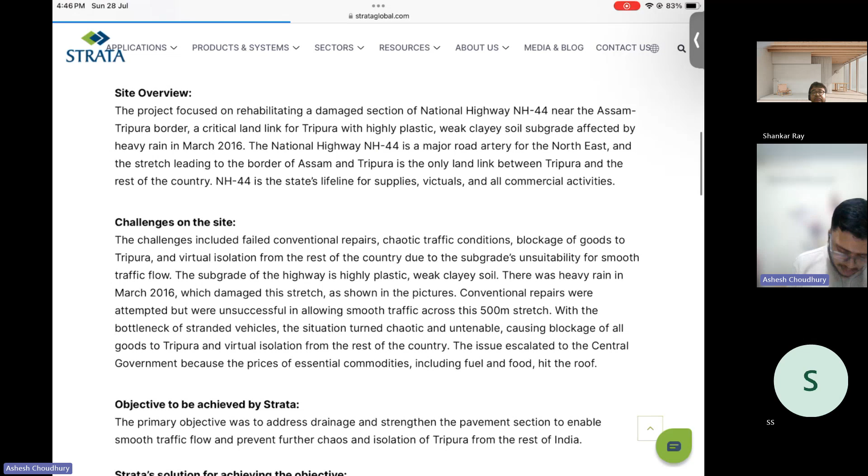Okay, they have this one also here - yeah, this one also I was speaking about this thing.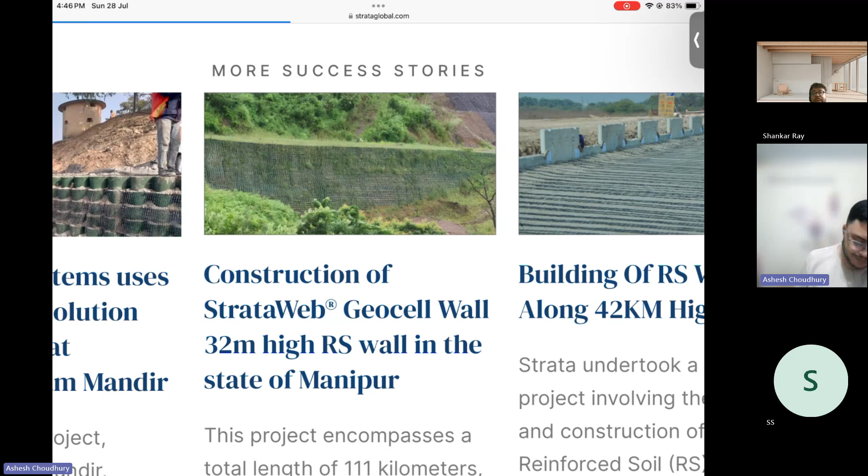In this case, with the geocell we can also construct walls. In layers you can put the geocell, and you can see beautiful vegetation cover has actually come up with that. This is the RS wall construction.

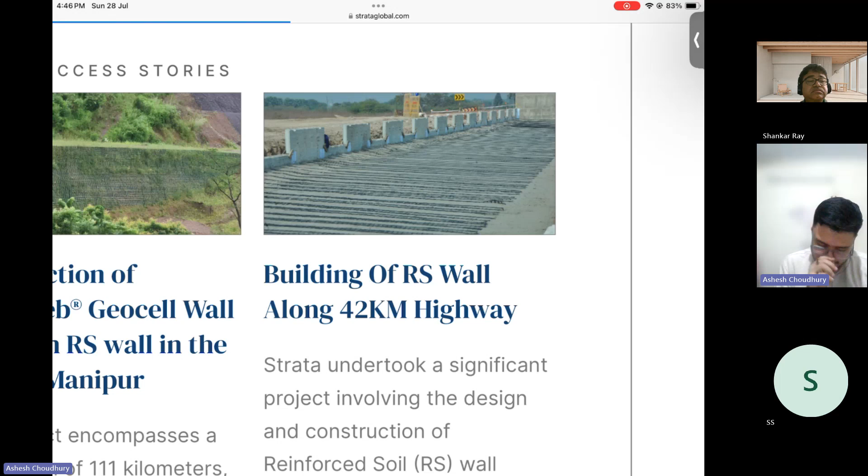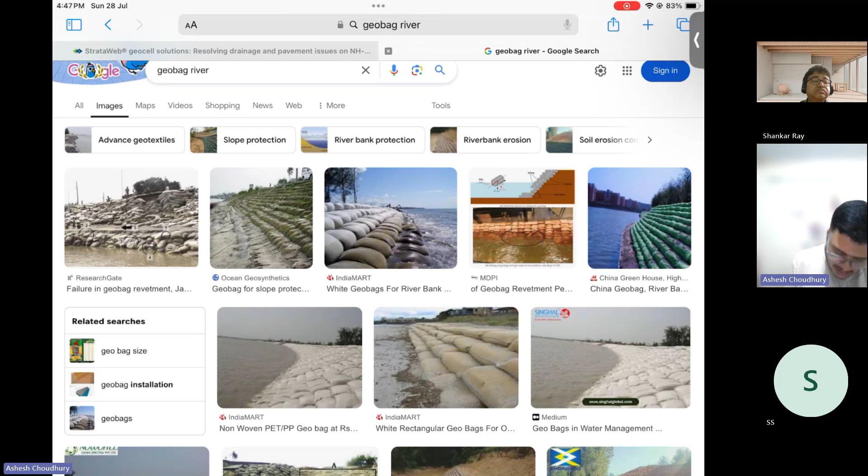We will solve some problems on this at that time. We will see some videos also of how step by step this is constructed - all these things we will see while we solve the design problems for this. And this geobags I was talking about, you can see the geobags here used for river bank protection.

With geobags, what happens is that even when water rises, the geobags prevent the inherent virgin soil from coming out with the water. When there is flood water and the water level reduces, the water carries away a lot of the river bank with it. The geobags prevent the main original soil from flowing out with the river. So these geobags are also regularly used.

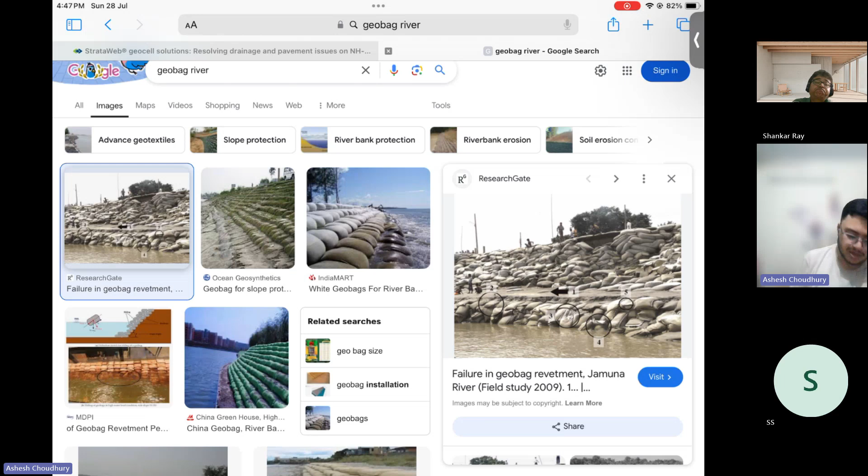Here also you can see non-woven PET, PP geobags - polypropylene, polyethylene or polypropylene geobags.

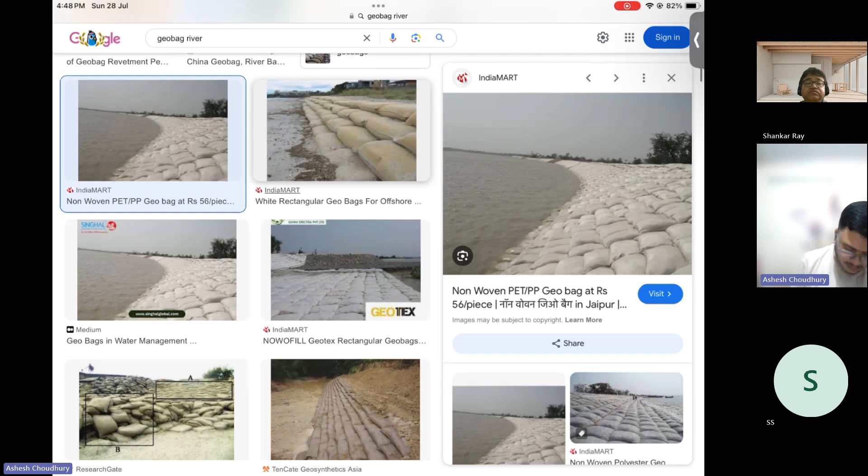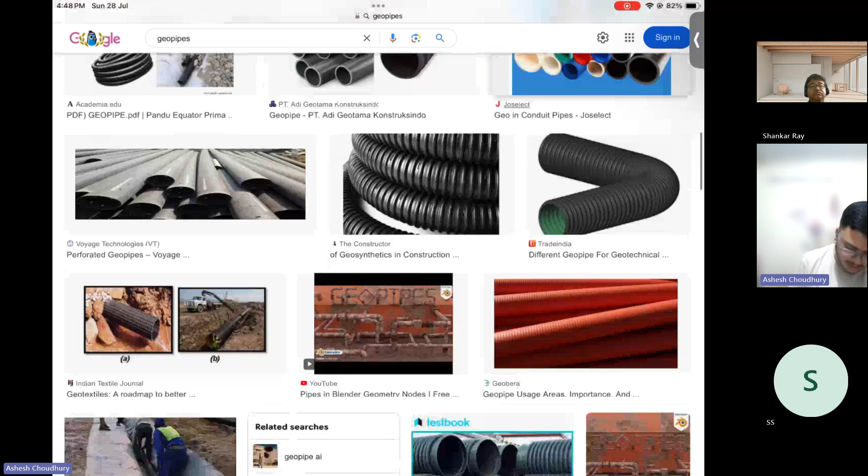Okay, so one more thing is there. We can see this geo pipes also. Not this one, not this. Geo pipes are something else, it is not shown here. I think they put some images. This is not geo pipe.

Okay, so there are many examples wherein these geotextiles are regularly used, and we will see this one by one as we solve some design problems also. The design problems we will solve in this interactive session will be quite simple, very easy, and I won't be considering the seismic part into action while I solve these problems. But some problems, the sir has also solved many problems in the class. So in the exam or whenever the questions will come, please consider the earthquake and other forces. We'll discuss that later. So in this interactive session, a live session is actually difficult, so we will solve easy basic problems only, but we will try to clear up the basic concepts regarding the design and everything. It will be clear.

Okay, so this was all about the types of geosynthetics, and one more thing. So then what was discussed was this, what to say, your polymers, right? Polymers. So I saw that assignment.

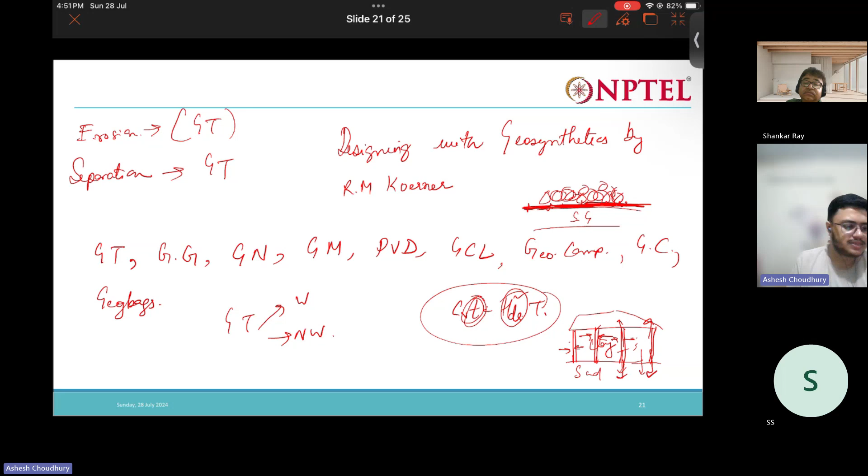So yeah, the main basic types of polymers, I will just write it here. These are the main types: polyethylene, polypropylene, polyvinyl chloride (PVC) very common, then PET, polyethylene terephthalate, polyamide that is nylon 66, and polystyrene. These are the main six important polymers that actually form most of the geosynthetics.

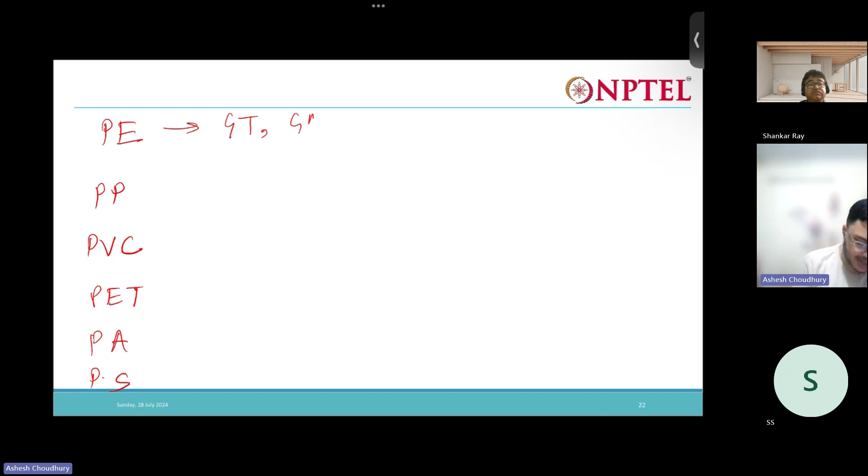Alright, so with polyethylene, geotextiles are formed, geomembranes, geogrids are also formed, geopipes are formed, geonets are formed, geocomposites are formed with this. Then we have polypropylene for geotextile, geomembrane, geogrid, geocomposite. Then we have PVC, as you can guess, geomembranes obviously, geocomposites, geopipes. PET, we have geotextile, geogrids. Then polyamide, geotextile, geogrids.

We forgot to discuss geofoam. It's also one more important geosynthetic that is used nowadays. Geofoam is nothing but thermocol, like thermocol only, if you have seen. Geofoams are used regularly.

You can use geofoams behind the retaining wall, as it reduces the earth pressure. You can also use it for embankment construction, since it's a lightweight material that lets you construct small embankments easily and fast.

Then you can use it for vibration screening. One of my colleagues here is doing research on that, and has done some experiments. Geofoams are a very good material for vibration screening, which is used for vibration isolation, say for railway tracks or machine foundations, active or passive isolation. In that case too, geofoams are actually very much useful.

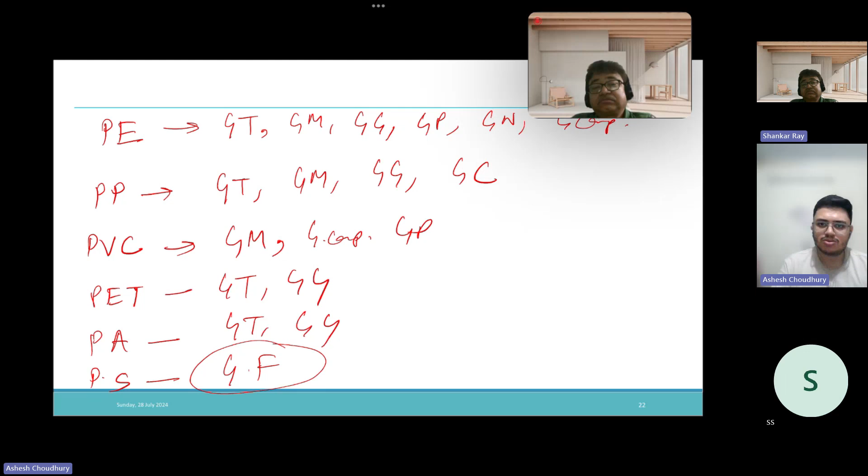And while solving, we will also be seeing some videos and all, so that will also be pretty helpful to us.

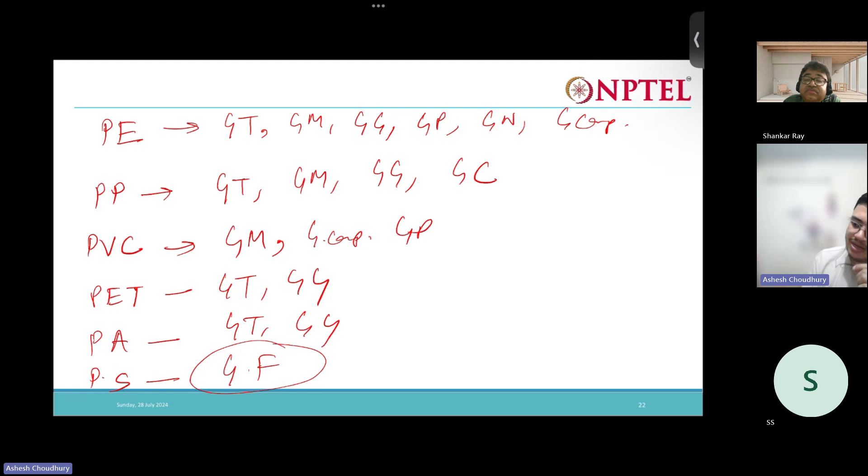What is e-masters? You will get a master's degree from IIT Kanpur only, but it is remote. Classes are held online and evaluations, quizzes, everything are held online only. It is flexible, like you can do one semester now, the next semester next term, or even a year later. It is very flexible.

Anyway, I'll tell you.